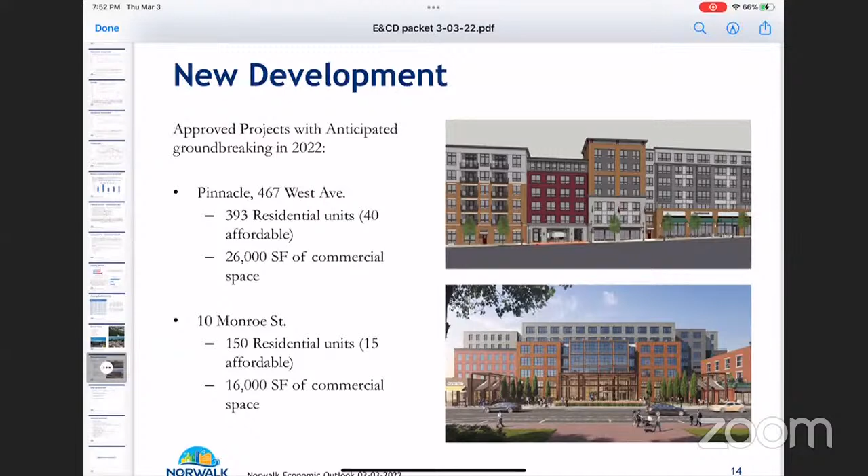If anybody has questions, I'll try to answer them. Well, I guess my question is, is it really going to happen? Yeah, so all their plans are submitted and approved. We're really just waiting for that demo permit to be pulled. Steve was expecting it and still is expecting it, so it will come soon. That's great, wow, long time coming.

Yes, exactly. And then 10 Monroe Street as well. This has already been through the process, and again we're just waiting on a demo permit. 150 residential units, 15 of those affordable, due to the 10% requirement that the city requires in their zoning, and an additional 16,000 square feet of commercial space. That commercial space does have a tenant that will be moving in, which my office helped facilitate. I'm not sure if they want it publicly known, but there is a tenant lined up already. That's great news when we have a new development with a tenant already lined up. So if anybody has questions on that, again, happy to try to answer them.

I am not equipped to answer that question. Steve might have a better answer for you. I know that we don't have a set number in mind that we go by, but Steve would probably be better to answer what we'd be looking at from a future planning perspective. A lot of our zoning changes are going to dictate how much build out we can physically accommodate, and developers do have to take into consideration draw on resources, draw on sewer, water, those types of things as well. So there are constraints naturally in place, but do we have a number where we specifically say we're going to have 20,000 more and that's it? No, we don't. Again, Steve can probably answer that question better than I can. So if you want to save it till he's here, I'm sure he'll be happy to answer it. Okay, thank you. Sure.

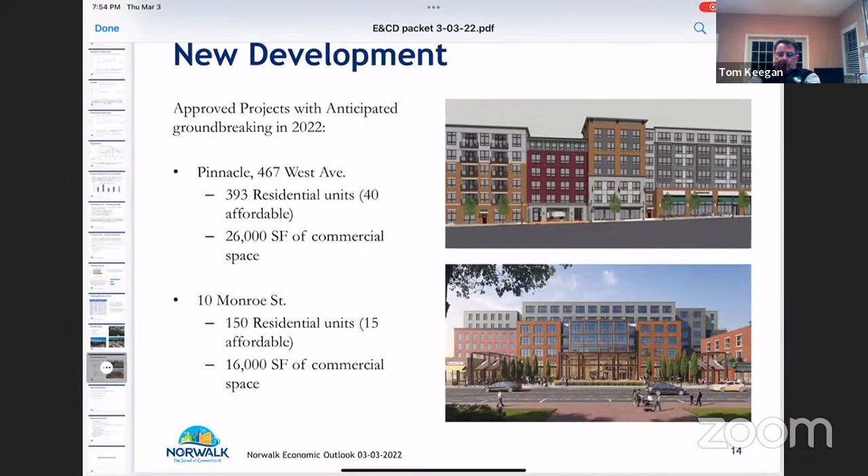Are we good to move on? I think the last slide is just anticipated projects that we're probably going to be seeing in the near future. South Norwalk, again, that TOD development - the transit-oriented development around Monroe and Chestnut Street. That's a lot of Spinnaker development occurring over there. East Norwalk, we also have that Wells Fargo site, as I'm sure you've heard. Wells Fargo is currently moving out of that spot. They will only have one location in West Norwalk, on West Avenue. That will be their sole branch in Norwalk at the end of this year. They're currently only operating at that branch, and there's also an additional one on Connecticut Ave. Yep, there's an additional one on Connecticut Ave, but the branch that's going to be their main flagship is really going to be that West Avenue branch.

And lastly, as we mentioned before, Westport Avenue and Connecticut Avenue - as you've seen, there's been development on both of those streets. On Connecticut Avenue, we have new apartments across the street from the Lowe's, and we have the Wegmans coming in. On Westport Ave, we have apartments in the rear of the Petco building, and we also had that storage facility as well. So those will be some new and reoccurring developments you'll probably see in the near future that we've heard of, but they have not submitted yet. So these are not things you'll see a shovel in the ground for anytime soon. They still have to go through the process, significant public process, significant legal processes, before we're actually going to see any development on these specific sites.

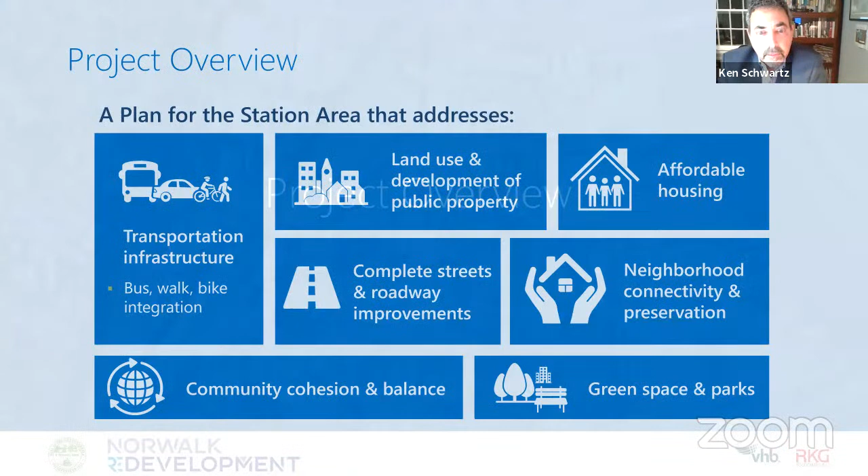The plan has a lot of goals and specific components. First and foremost is the transportation infrastructure, looking at ways to integrate bus, walking, and bike connections with the rail station itself. We also looked at land use and development of public property, specifically on the west side of the station, where there's significant land under public ownership. There's a very strong affordable housing component to the plan.

We also addressed complete streets and roadway streetscape enhancements, with a concerted effort around neighborhood connectivity and preservation, specifically on the east side of the station. We also looked at opportunities for additional green space and parks, which came up during the community discussions we had.

The plan has a lot of goals, and as Brian likes to say, it's a series of trade-offs and identifying what those might be going forward—from improving neighborhood connections, the affordable housing component, filling in empty and underutilized lots, to identifying the future build-out potential of specific development sites around the station. The plan builds off of the city's plan of conservation and development, which specifically called out recommendations for development around the train station itself.

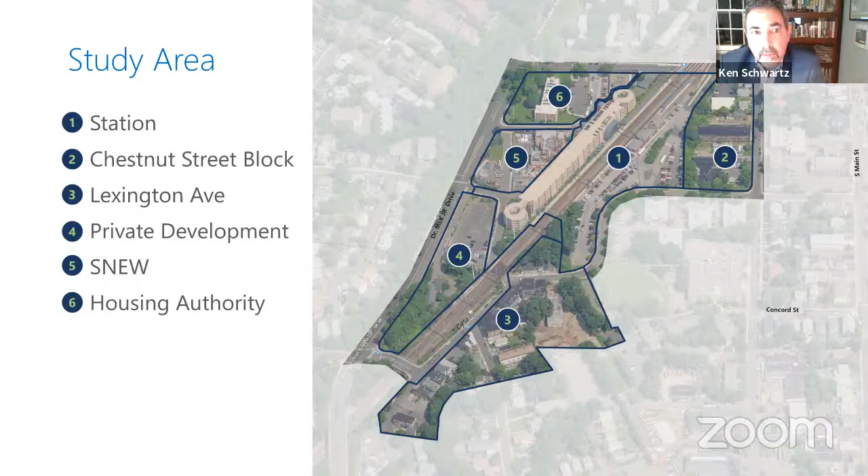At the same time, we need to balance future development with community needs and desires for the South Norwalk neighborhood area, looking at opportunities to improve transit, improve street infrastructure, and focusing on equity and affordable housing, historic preservation, sustainability, and complete streets.

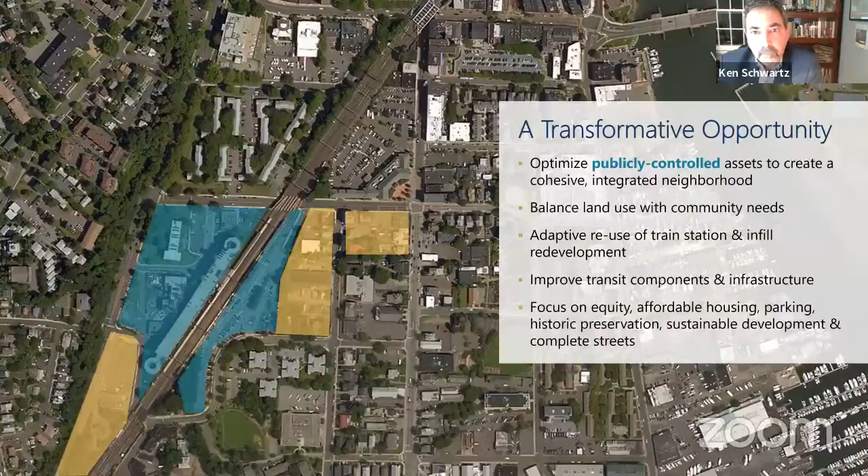From a historic and neighborhood preservation standpoint—something near and dear to the community when we met with them—while we're looking to encourage mixed-use infill development around the station, we need to be mindful of protecting the residential neighborhoods from future development, protecting the historic building context around the station, and concentrating higher density development within a quarter mile of the train station itself.

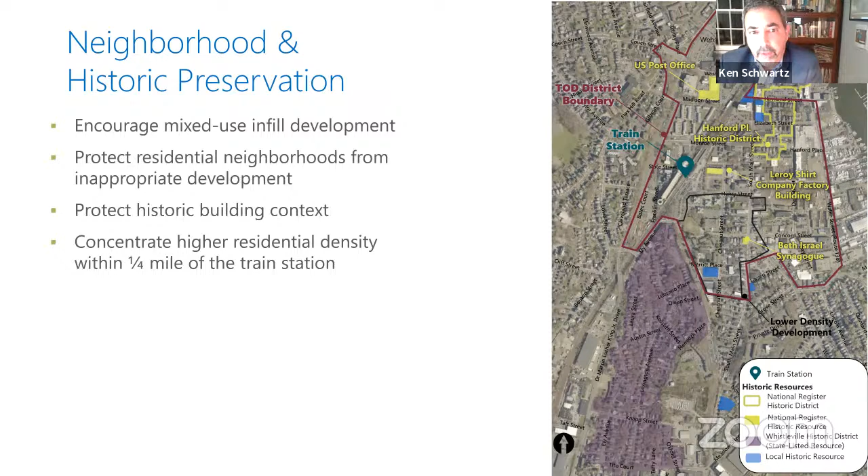As I alluded to earlier, this was an extensive community engagement, a highly iterative process. There was a community advisory committee that we met with a number of times over the past year, and a technical advisory committee as well. We undertook a community-wide survey that got some really valuable input, and then had a series of public meetings. This all reflected input and comments that we received, which are reflected in the final plan we're sharing with you tonight.

Just to highlight some of the community input we got, we conducted a community walking tour in September of last year. Key takeaways were a real desire for affordable housing ownership and pathways for affordable housing ownership, which Eric Halverson will address specifically in his presentation.

Community-oriented commercial uses came up, as well as streetscape enhancements like additional green space, tree plantings, and sidewalk enhancements. There was concern about traffic impacts from future development, and discussion of options for where the transitway should be located, whether on the east side or west side of the station.

We walked the streets and the area around the station with the community. These are some photographs we took of specific areas identified, whether the underpasses at Franklin Street, the bus activity at the station, or the intersections of MLK Drive with Monroe Street and Henry Street. These were all elements and areas around the station highlighted and discussed with the community.

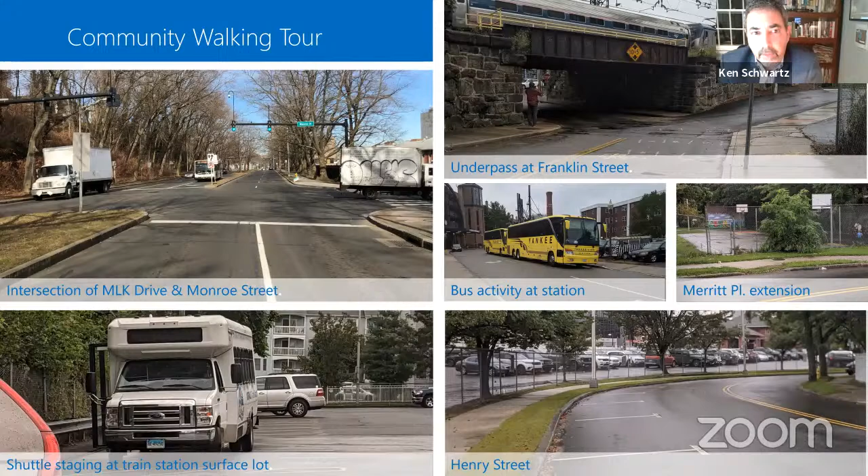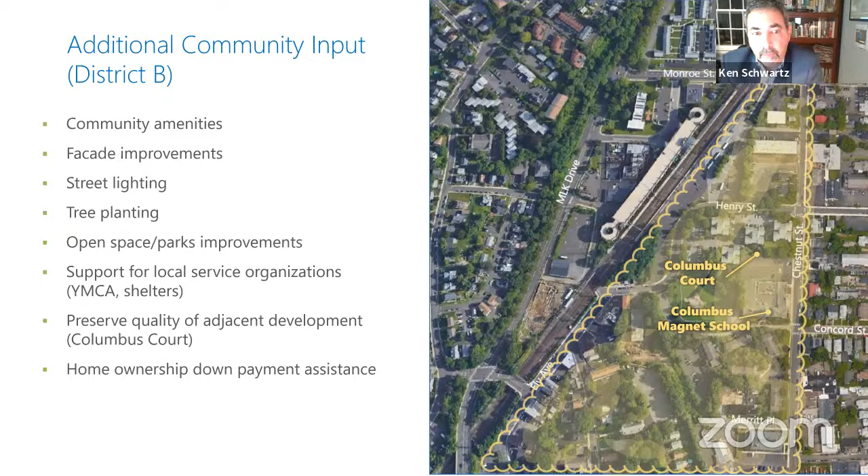We received additional community input from District B, highlighting community amenities, street lighting, tree plantings, open space enhancements, support for local service organizations like the YMCA and shelters, preserving the quality of adjacent development like Columbus Court, and again, home ownership down payment assistance. You'll see that was a theme that came up over and over again - pathways for affordable housing and home ownership in the community.

There was also a survey taken with about 280 respondents. Themes that emerged were again a strong desire for neighborhood-oriented uses like grocery stores, community coffee shops, and recreation facilities, and a strong desire for a more pedestrian-friendly walking environment with improved lighting, streetscape enhancements, and wider sidewalks.

Most recently, we had a community advisory committee meeting in December. We discussed with the community and shared some of the options we're exploring around affordable housing, home ownership, and the transitway location, sharing the various options we've come up with. We also discussed the private development on the east side of the station, the Spinnaker development that's planned and built, as well as the long-term development plan for the TOD plan we're working on.

Most recently, we had a really good virtual public meeting in January, with a little over 40 to 50 attendees dialing in. Takeaways from that meeting included people acknowledging the importance of increasing density near the train station, a desire for more enhanced open space around the station, and a focus on green building design and low impact development.

Here you can see the station layout and the transit elements at the station. I think a lot of us are familiar with it. We have a bus drop off and pickup on the east side of the station, surface parking lot also on the east, and within that there's some space for bus staging. On the west side, you can see the garage access points. There's a taxi staging area, as well as some SNEW customer parking.

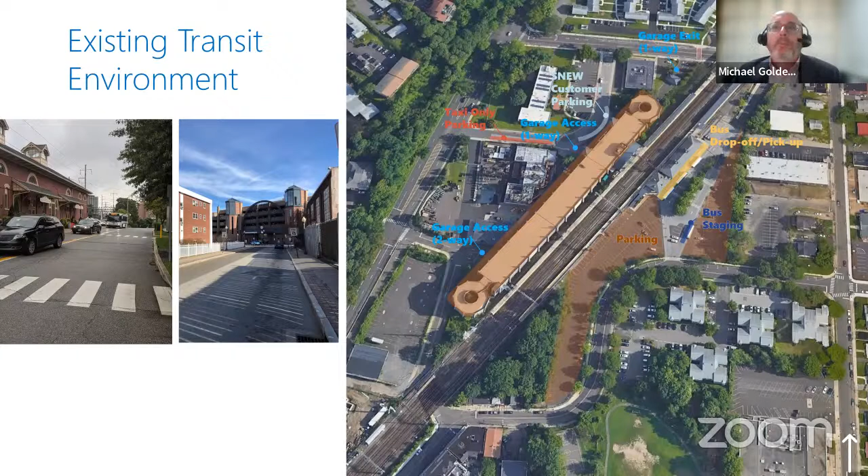Here's a mix of the public bus and public shuttles serving the station. We have 3 buses, 6 shuttles. The headways are generally ranging between 20 and 40 minutes, and the shuttles are primarily focused on serving the AM and PM peak periods.

I'm sorry, what's headway? Headways are kind of when the buses come to meet at the stop, so sort of every 20 minutes during the peak hour or so. Essentially the frequency. Yeah, okay, thanks, sorry about that.

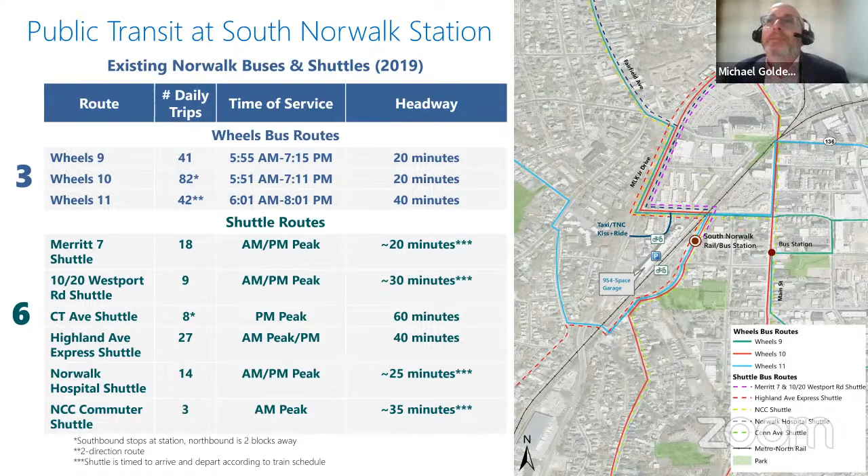This is generally based on 4 shuttles, the Merritt 7 shuttle, the Westport shuttle, the Norwalk Hospital, and the NCC commuter shuttle, which are scheduled to meet up with trains, specifically the New Haven bound 804 and 837, and the New York bound 803 and 833.

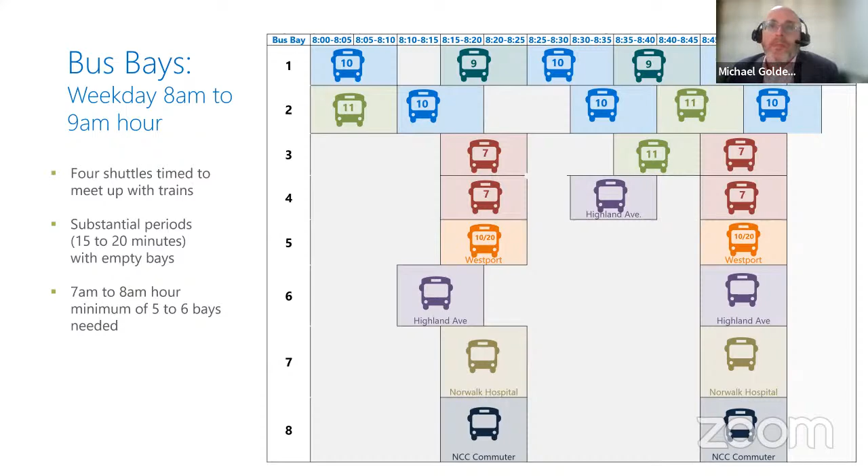Now we'll go through a few of the transit way options. This first option is a transit way on the west side of the station. Benefits to this concept would include a seamless rail bus connection, good bus flow between MLK Drive and the transitway, and the ability for bus operators to have access to layover facilities.

One of the concerns we heard about a transitway on this side of the station from the community was related to air quality emissions, and we certainly recognize this, but we also feel this is more of a short-term issue, as this whole plan is a number of years out, and bus technology is changing so quickly these days. At some point in the near future, the district's bus fleet will be an all-electric fleet, so we won't have these issues related to emissions. So that's a really good thing.

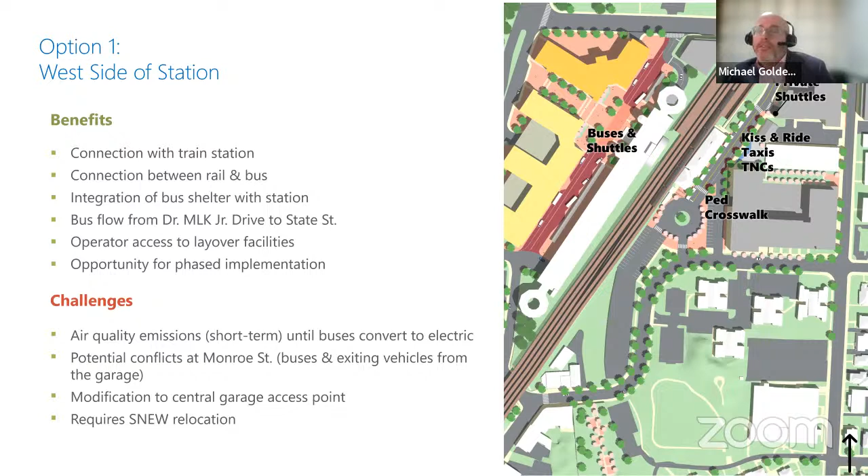The most significant challenge with this concept is that it requires the relocation of SNEW off their existing site. Because of that, we looked at opportunities for a phased implementation. We wanted to see what would happen in an interim condition if we used the existing roadway on the west side of the station.

So the concept laid out here, you get some of the benefits of that first concept, but in a more limited manner. On the east side of the station, you can see from the graphic, we would use it for kiss and ride, passenger drop off, taxi pickups, TNC, Ubers and Lyfts, and so on.

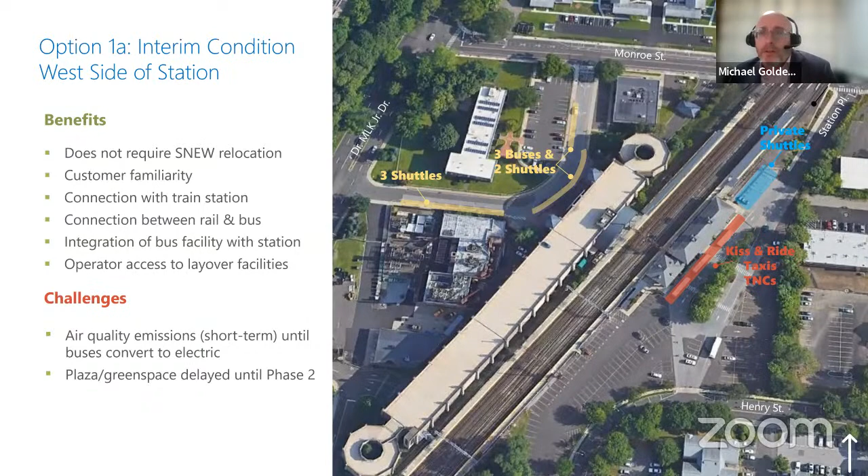One drawback we did hear at the TAC meeting was the loss of some dedicated SNEW customer parking, which is right in front, right here. So people stopping at the office would no longer be able to park if this was fully utilized. So that is an additional consideration.

Our next option is along MLK Drive, and this was derived directly from the community, from our walking tour, to see what would happen if we pushed the busway further west, a bit more distant from the existing development. Benefits to this concept are it frees up land around the station for other potential uses, like additional plaza or green space, and it doesn't require a property decision with SNEW.

But from an intermodal perspective, there are a lot of challenges with this concept. You don't really get that seamless connection between rail and bus. Passengers getting off on MLK would have to walk 500 to 600 feet to the station. There is more distance to be covered. This would also require the removal of one traffic lane in each direction on MLK in this area, as well as a little bit of land acquisition to accommodate a sidewalk on the far side of MLK.

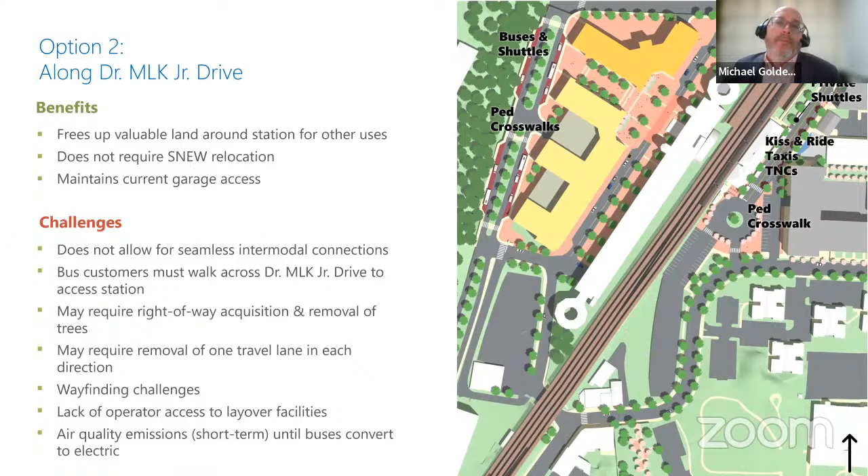So our last option we looked at was utilizing the east side of the station. It's really similar to today for the transitway, and this really offers passenger familiarity. There's good station access. We did coordinate this - we had a few meetings with Spinnaker to make sure this concept did not preclude their 1517 Chestnut development, and vice versa. So that was coordinated as well.

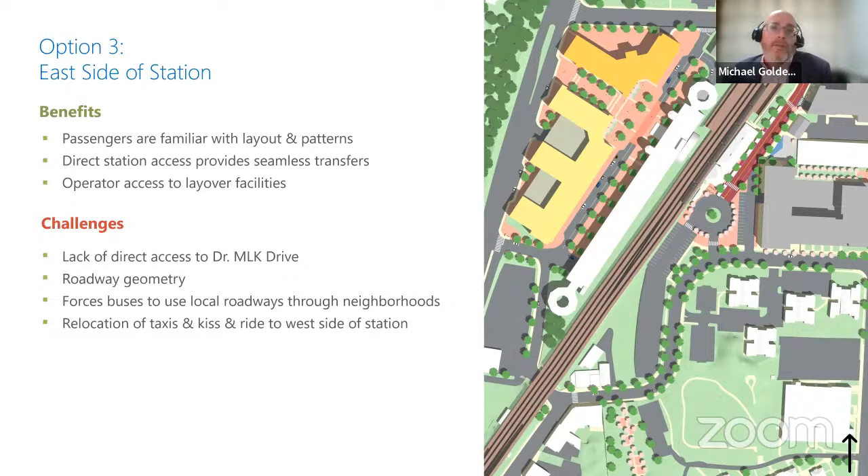So here it's really a planner screening looking at the three options with different considerations ranging from location to environmental, and the ability to implement. The west and east sides score well.

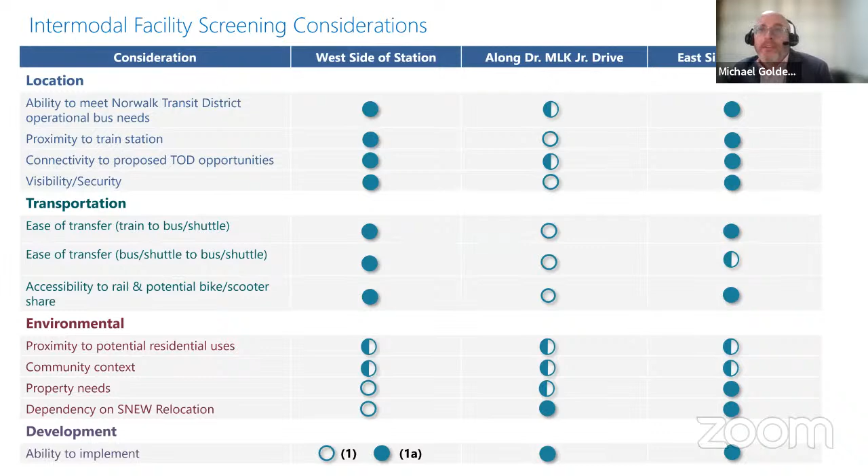Really our recommendation is in the near term to utilize the east side of the station for the transitway as an interim measure. And longer term, once SNEW and the Housing Authority are relocated, our recommendation would be to build out the west side of the station for the transitway. We think this would offer the long-term opportunity to develop South Norwalk Station into a really well-integrated transit facility.

So as I mentioned, the near term we're going on the east side, and the west side would be the longer term. Benefits to that include the fact that the transit district, if there was a facility like this, could really account for the transitway should they plan for a bus network redesign to improve their system. There are reduced operating costs. Sometimes with a dedicated facility, it offers the ability to better time buses, to optimize transfers to other buses or rail, and layover times when buses are not in operation can be more prescribed.

And the last thing I'll mention is that if the west side is implemented, the east side can really be used for passenger pickup and drop off, and more bicycle-focused with pedestrian infrastructure, because that side of the station really has a natural connection to other areas of South Norwalk, and that can also be utilized.

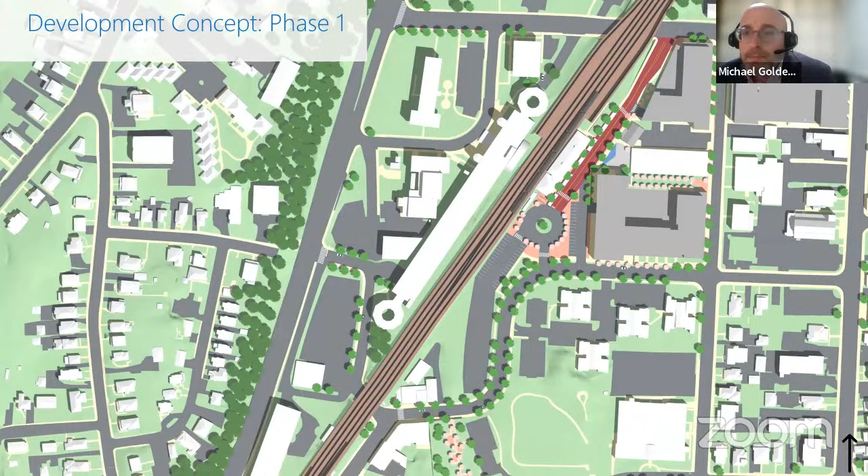Sorry about that. So the development concepts - we've come up with a two-phase approach, phase one and phase two. Phase one is plus or minus 5 to 7 years, and it focuses on the east side of the station, using, as Michael highlighted, the railroad place for the transitway, shown in that brown, rust color. Then the development east of the train station is on privately owned land that has been either approved or is in the approval process, identified in the gray buildings in the upper right-hand corner of the site. So that's the next 5 to 7 years, focusing on the east side of the tracks.

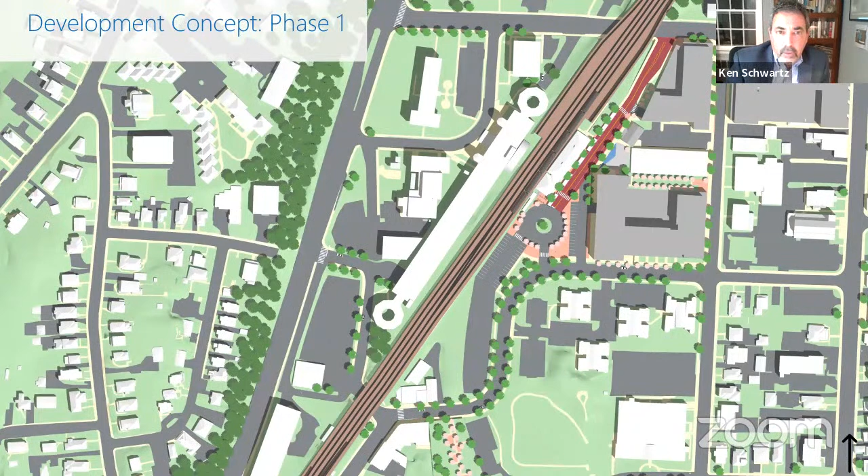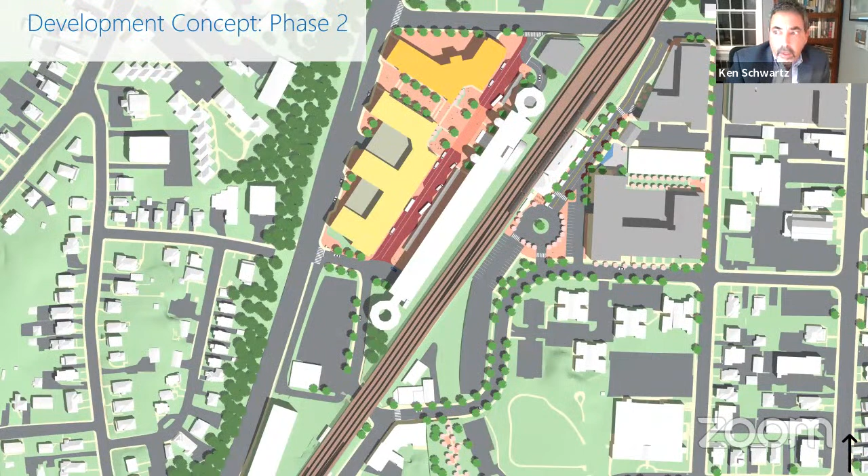If you go to the next slide, phase two is the west side, shown in yellow, which is the future development on the Housing Authority and SNEW site. The existing zoning in the South Norwalk Special Design District allows for buildings up to 6 stories, and our future build-out under existing zoning is about 440 residential units, with an additional 13,000 square feet of administrative space for the Housing Authority and 13,000 square feet of ground floor retail space. Then as part of that would be plaza and outdoor space integrated into the transitway and the new development, highlighted in pink.

And then the west side transitway, as Michael had shown previously, is highlighted between the new development and the parking garage itself. We also explored a higher density option, which would go up to about 10 stories in building height, accommodating upwards of 700 units of housing. So between 440 housing units under existing zoning and an increased density option of 700 units is shown on the plan.

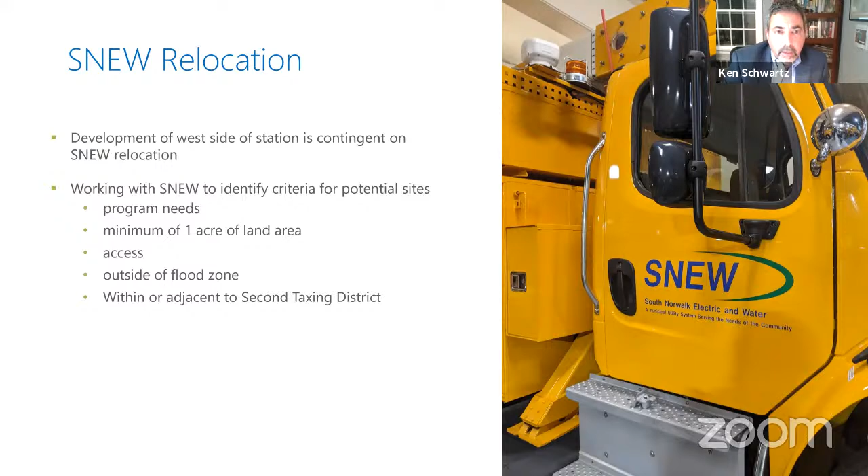So I think the last piece of our presentation, if we go to the next slide, I'll turn it over to Joe Bauskas, transportation engineer from VHB, who will walk you through what this means from a transportation infrastructure perspective.

Thanks, Ken. Good evening, everyone. I know we're running a little late here, so I'll try and skip through the slides.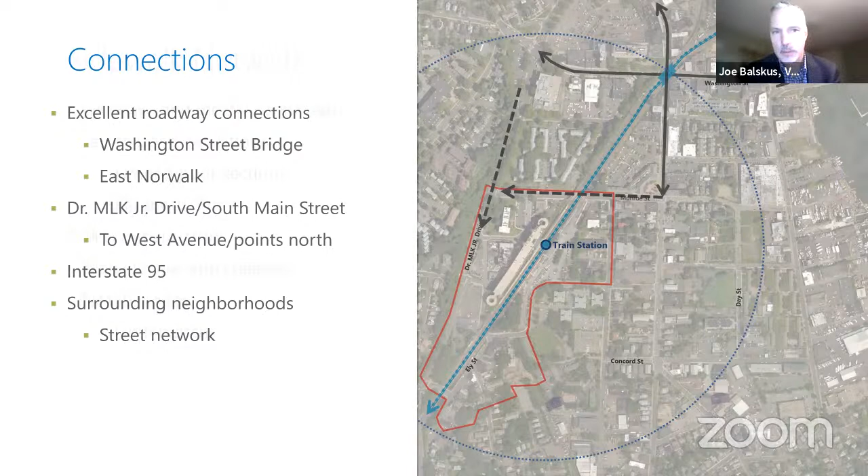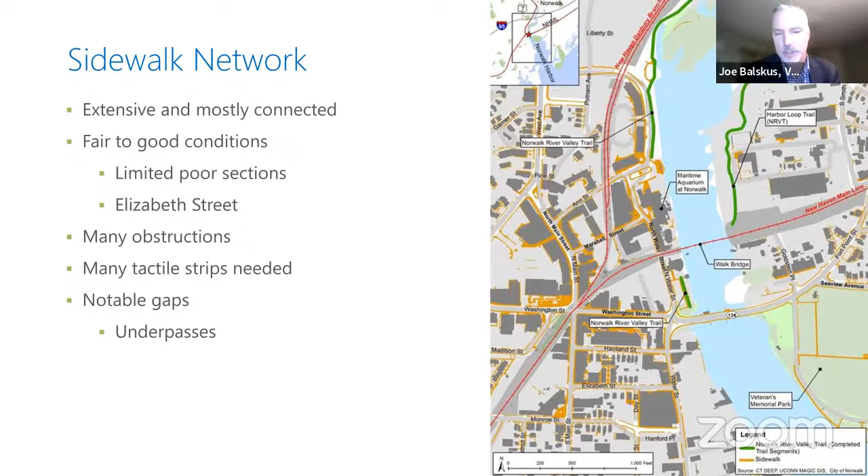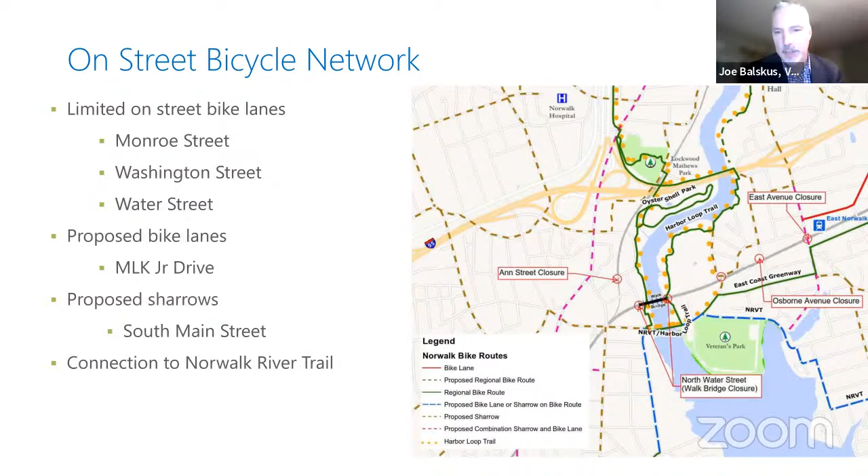Next, in terms of bicycle infrastructure, there are planned bike routes being investigated now along the Norwalk River, as well as on-street bike routes in the area. We have some limited bike lanes on Monroe Street, Washington Street, and Water Street, and some proposed ones as well. The intent is to eventually connect those to the Norwalk River Trail across the bridge when that comes to fruition. So we don't have an extensive amount of bike networks, but we have lanes in the area we can work with to provide mobility from the train station to other bike routes.

Next, in parking, Darlene mentioned something about parking at the beginning of the presentation. There was a previous inventory done for the facilities in the area. We reviewed that analysis, including the Webster lot, the Sono train station, and the East lot. There are some additional studies being done of the parking lots themselves in terms of utilization, including overnight utilization, and that involves a shared parking analysis.

But I do want to talk about parking. What we're seeing in most of the urban communities we've been working with is trying to minimize parking. With this project located next to a train station, we're certainly expecting the parking demand to be less than you would typically find in a suburban area. So we're looking to see where there's available parking, where we can share parking, and at the same time where parking can be minimized, because it is a TOD project.

We also looked at the roadways themselves, as outlined here, and also the intersections. We've built a lot of traffic models based upon the Walk Bridge projects everyone is aware of, and added some additional intersections to the study. We also looked at other projects being planned that Michael identified in the study area, so we have a whole traffic model for this entire area, looking at existing conditions as well as projecting traffic from developments being planned and approved on Chestnut and Monroe, as well as the development plan that Ken showed you for the train station site. Using all that data, we developed an extensive traffic model to look at how these intersections will operate from a vehicle standpoint, a pedestrian standpoint, and a bicycle standpoint.

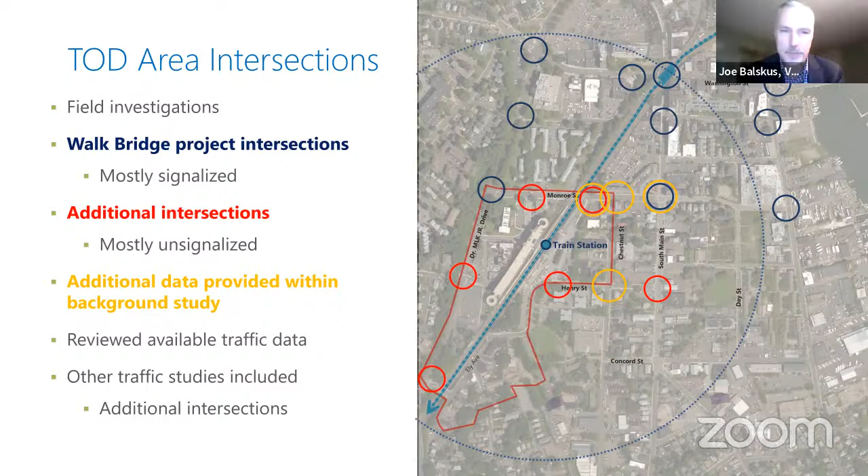So those developments I'm talking about are highlighted here. Obviously the TOD developments on the west side of the train station, the Monroe Street development, the Spinnaker development that was talked about, and also the platform.

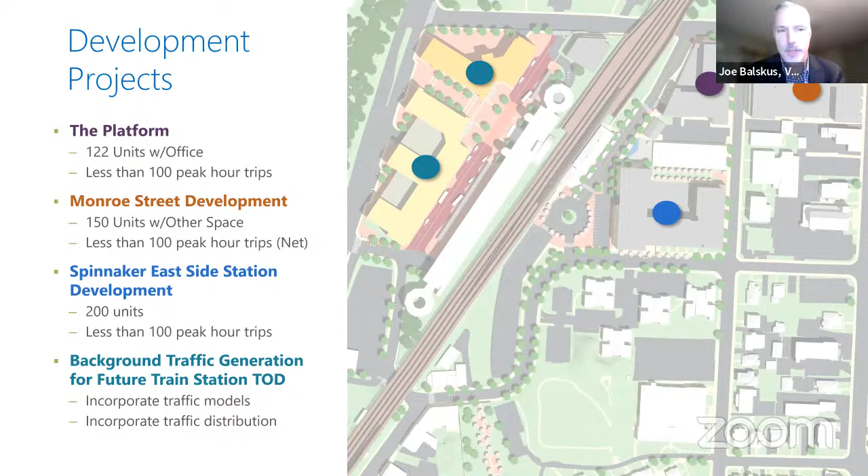So these were all incorporated into the traffic models that were developed for this project, and allow us to develop a background traffic model, and then from there a future traffic model with the train station development, the TOD. And all the units are identified here, as you see.

So using those developments, we developed traffic generation for vehicles and persons as well, using the Institute of Transportation Engineers Trip Generation Manual, 11th edition, which came out just last year. And we generated traffic for all the developments.

We also reviewed the traffic studies for the other developments being planned. And what we're looking at in total, including the train station development, is about 2,800 daily trips from those TOD developments, a couple hundred in the peak hour - about 230 in the morning and afternoon peak hour - and about 100 people we estimate walking, biking, or using transit.

So the intent here is that we're not going to have your typical traffic generated from the suburban area. We're going to have traffic using different modes - cars to go to the highway, walking, biking, as well as using the train station.

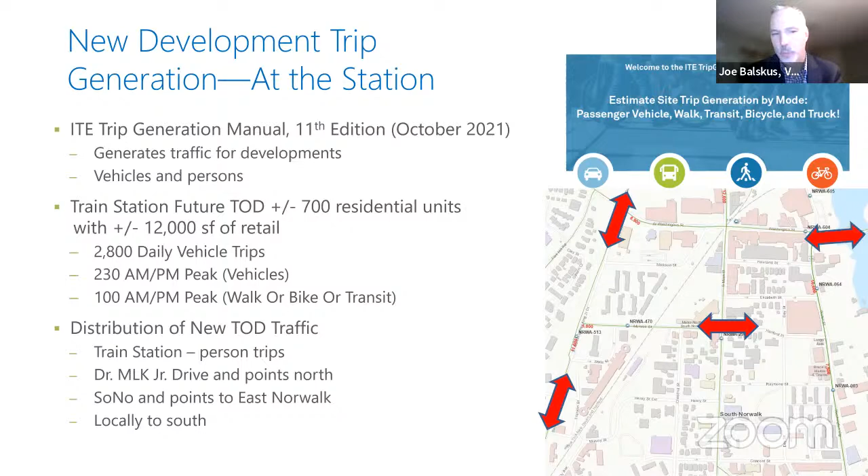So we distribute that traffic from the train station, with the person trips going to MLK Drive, to points north, and SoNo itself, and points to East Norwalk, as well as some local traffic to the south.

And just to focus on a few critical intersections in terms of level of service - level of service is a gradation of intersection operations and capacity, A being the best, F being the worst, as you may have heard in previous studies.

From our analysis, we didn't really find any congested intersections at level of service E or F. We found mostly pretty good operating intersections in the morning peak hour. South Main Street at Monroe Street is level of service C. Chestnut and Monroe is level of service B, and there's some traffic being generated there. But for the most part, we've got acceptable operations in the morning peak hour.

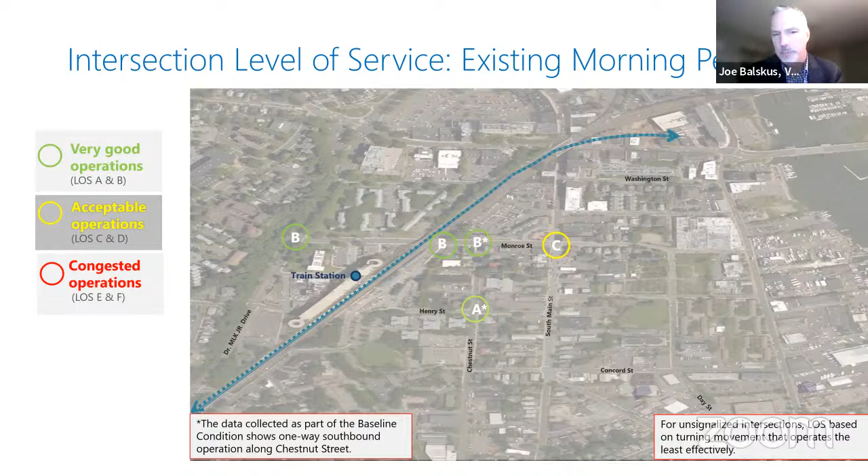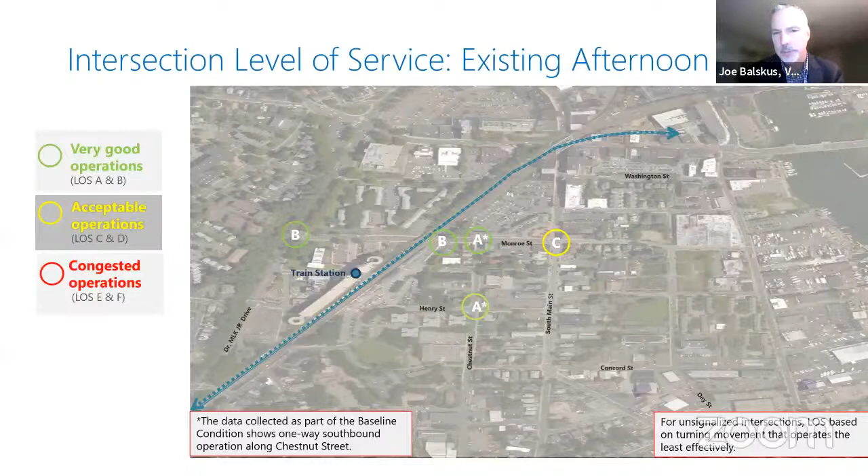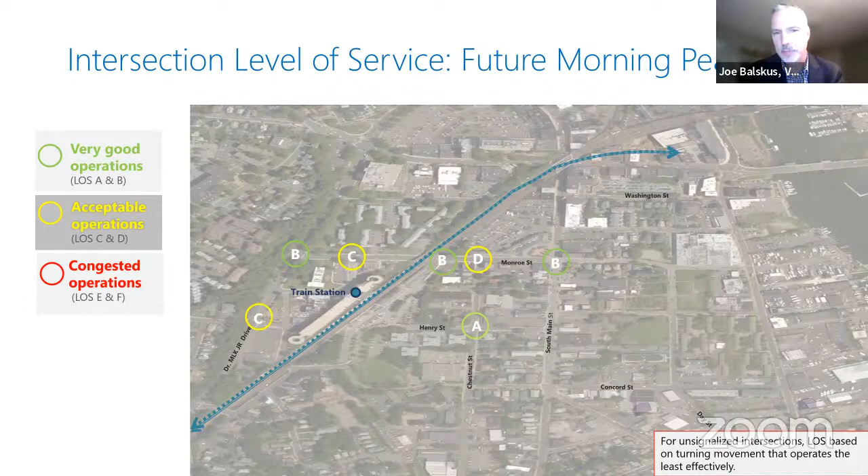Not level of service E or F, which is congested, but level of service D, which is an acceptable level of service. That's one thing we identified in the morning peak hour - same thing in the afternoon peak hour, which is again a result of the heavier traffic flow on Chestnut Street from those developments.

Not as much traffic from our train station development affects this, because most of that traffic is going to use MLK Drive and Monroe - it won't be affected. But this is something we see with the inclusion of all the developments in the area: some reduction in level of service. Is that terrible? No, it's a reduction, yes, but level of service D is acceptable operation. It's a function of how much time it takes to turn out of Chestnut Street onto Monroe - that's really the level of service. The Monroe Street approach itself is not really affected.

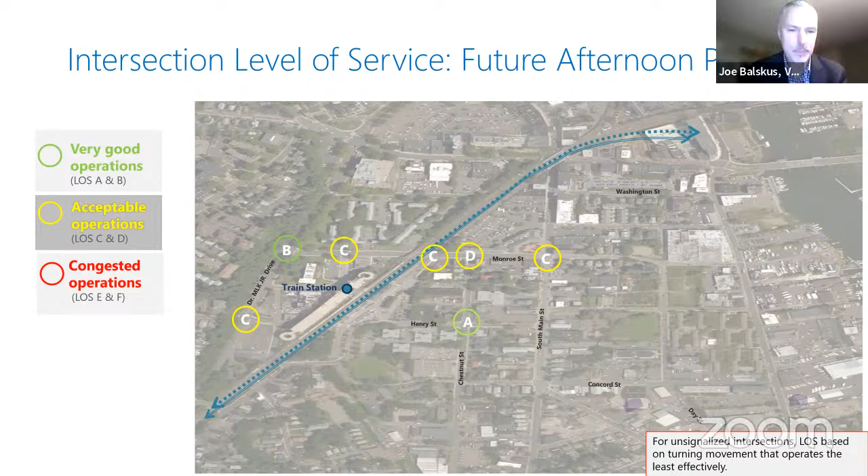So what does this all mean in terms of our analysis? We have excellent access to the train station and surrounding neighborhoods, supportive infrastructure, and city collector roads and arterial roadways that provide access to the train station. We have some moderate peak hour and daily traffic volumes.

Let me be clear, this is all based upon pre-pandemic volumes, not pandemic level volumes. Although we are seeing in many locations in Connecticut, pandemic volumes are now very close to pre-pandemic conditions.

I didn't talk about crashes before. We haven't really found any location in the study area with unusual crash patterns that need to be addressed. There are typical crash patterns, like angle crashes at some signalized intersections, but nothing unusual that would require review before adding traffic.

As I mentioned, level of service looks very good, at level D or better. We did see some reductions, but nothing significant in terms of operations.

In terms of mitigation, we talked about some of the streetscape improvements we're proposing, but we're mostly looking at minor traffic signal timing changes to the signals on MLK Drive, Monroe, South Main, and Monroe as well. So that's what we're looking at.

We didn't see a need to do any major improvements to address the traffic. We have a good network there, well distributed, and it's a TOD where a lot of residents are going to use the train station to get to work.

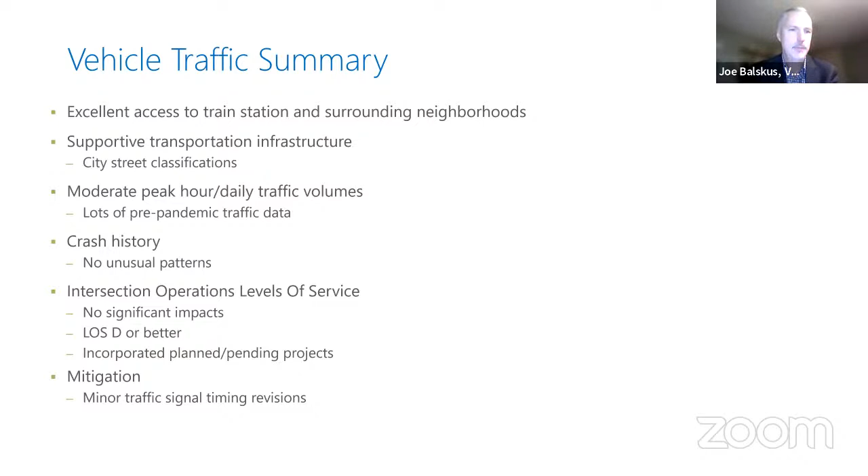Thanks, Joe, and I think we just have one final slide. Thank you all for your patience, I know we've thrown a lot at you. We're at the final lap of our work, in the midst of finalizing and preparing a final draft of the plan, which we'll release in the next several weeks to obtain public comment, and then we'll finalize the work.

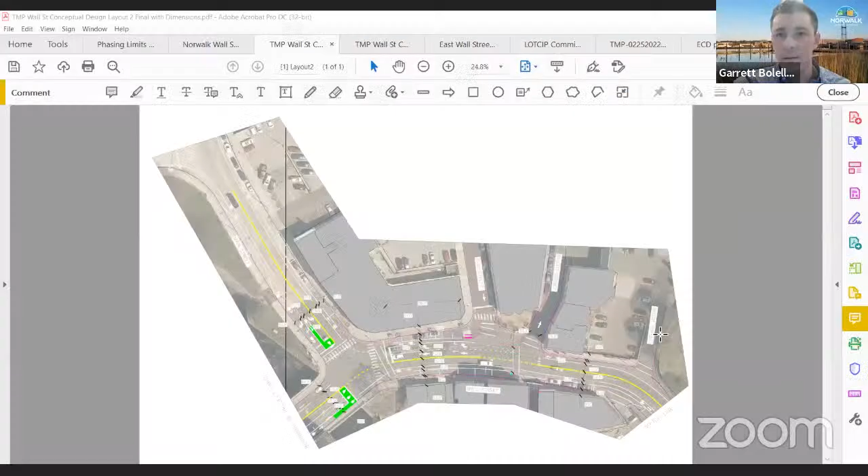All right, I'm going to share my screen. Let me just zoom in. Could you just zoom in a little bit, Garrett, so they can see? This is going to be a little hard to see, apologize for the rough quality. So this is kind of like engineering at its best, right? This is what we did in CAD, computer aided drafting here. If you could shift it over a little bit to Brook Street.

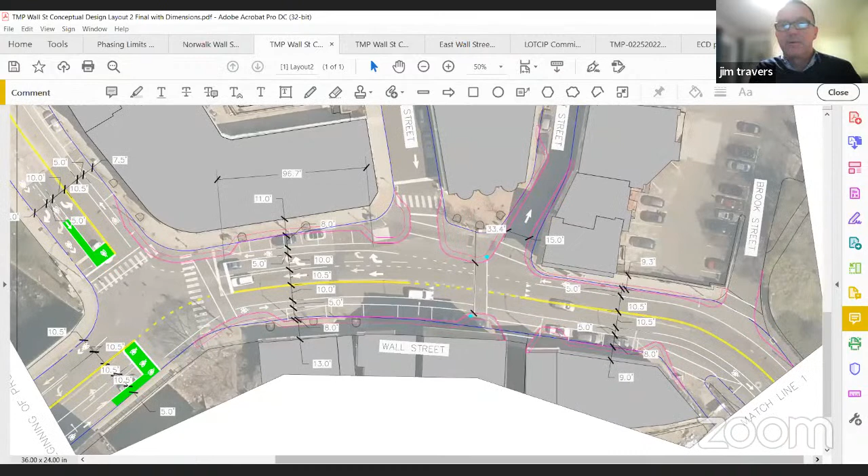The area in pink is indicative of what we're seeing as the new curb line. We're seeing consistent travel lanes through the corridor, with a 5-foot bi-directional bike lane in each direction. Where you see the number 8, that's indicating bulb outs, protecting the parking and tightening the road to help control speed.

We very much heard from the community early on, from DPW's comments and the community, a desire to have a mid-block crosswalk. We're moving the crosswalk, which was a bit more to the east, to connect to that island because we think it's a better placement and more in line with the parking. Those bulb outs are going to be consistent things you'll see through the corridor.

This is the rough part of the design we're running with. We're expanding the sidewalks wherever we can, and more so, we're bringing consistency in the road network.

We believe through better design we'll be able to control speeds, which is one of the things we hear a lot from people on Wall Street—the speed of vehicles going down there. In conversations I've had, the speed of those vehicles is doing exactly what we designed them to do, because the road was designed in a way that's really wide in some parts, and the reason you're comfortable driving on a highway is because of how they built the highway.

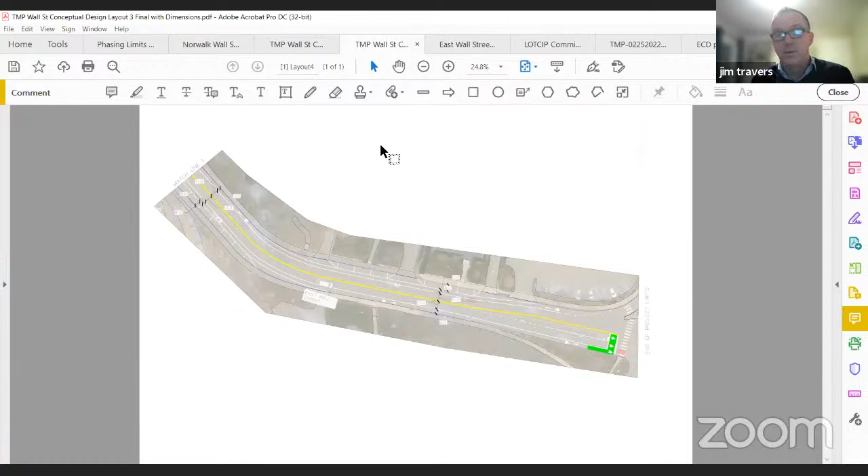But what we really are committed to is a consistent corridor. The bike lanes, we are looking at bike lane design on the full length of West Rocks, on France, on Park. They'll come down here, you'll go on Main. So we're really looking at a much stronger connected network, which I think starts to reduce our reliance on vehicular traffic and gives us better opportunities. If we can make more walkable neighborhoods and walkable communities, I think we're going to be a much stronger community. So we're very much committed to that design.

Thank you, Jim. My question is about the bump outs. I've seen them in another community nearby, and there's some concern about trucks turning. Will we have anything that we should be concerned about with larger trucks?

So we are running a truck turning template on every single one of our applications. So I hear you, these are relatively smaller. I think in that aspect they're really just protecting the parking, which makes it feel a little different. But you not only have the travel lane, but in this instance you also have the 5 foot bike lane that helps in that turning maneuver. We are running a truck turning template, a software that allows us to simulate how trucks turn and maneuver, so that we look at the type of truck that goes through the corridor and make sure it's going to be designed for that. So that will be...

So this is our concept, this is preliminary what we saw, this is what we're going to be giving to the consultant. But we will be requesting a truck turning template on the final design. So it should not be an issue.

Any other questions? Oh, Lisa?

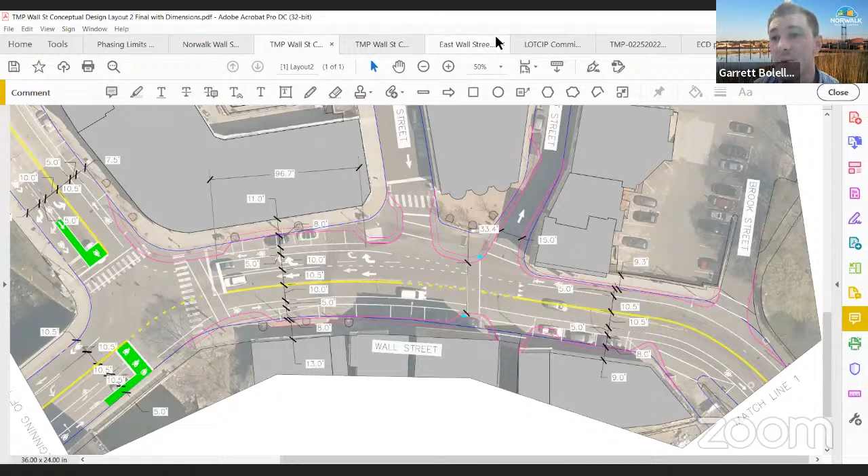At the last Parking Authority meeting, we brought forth some proposed improvements to the Yankee Doodle garage to really update it and bring it to the 21st century, some aesthetic and functionality improvements, because we know we're going to look at converting Burnell Boulevard to a two-way roadway and really improve access. So the Parking Authority is starting to look at investments to make a much better garage and improve connectivity to the area, improve parking conditions for people coming downtown. We foresee that project happening in the midterm after this phase one.

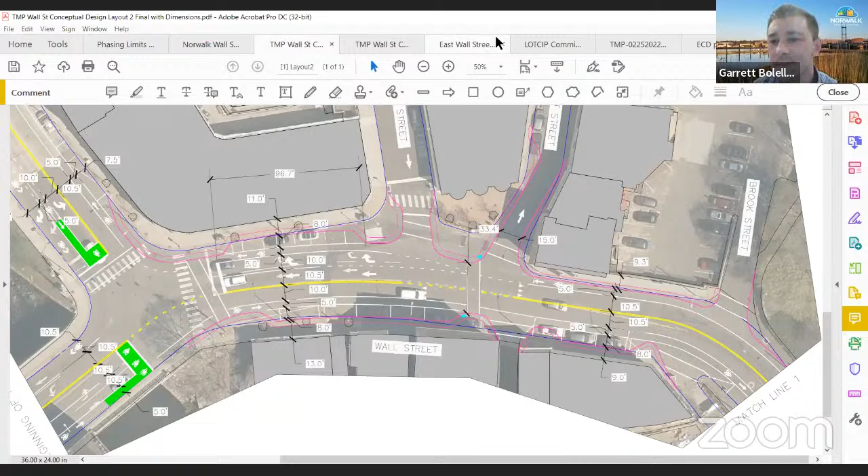Okay, seeing no other questions, I would also like to thank you, Garrett. Thank you, Jim, for all this hard work. It's good to see this ball rolling, and hopefully that saying, build it and they will come, holds true.

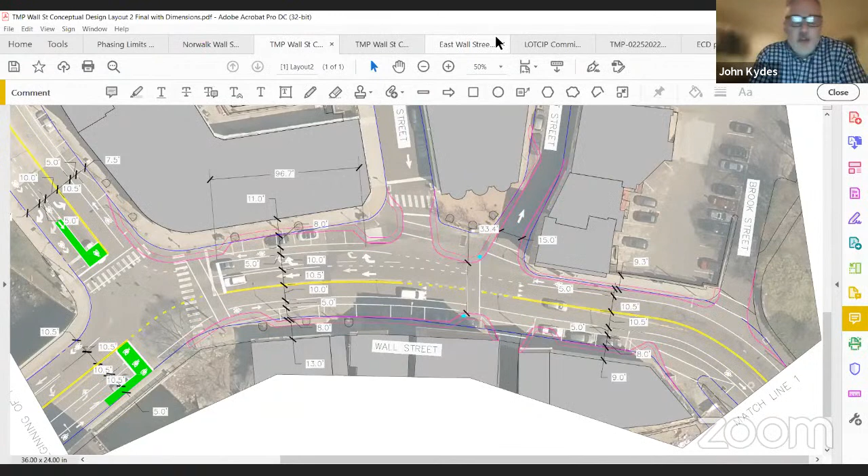If there are no other questions, I will now call for a vote. All in favor, please raise your hand to signify yes. And that would make it unanimous.